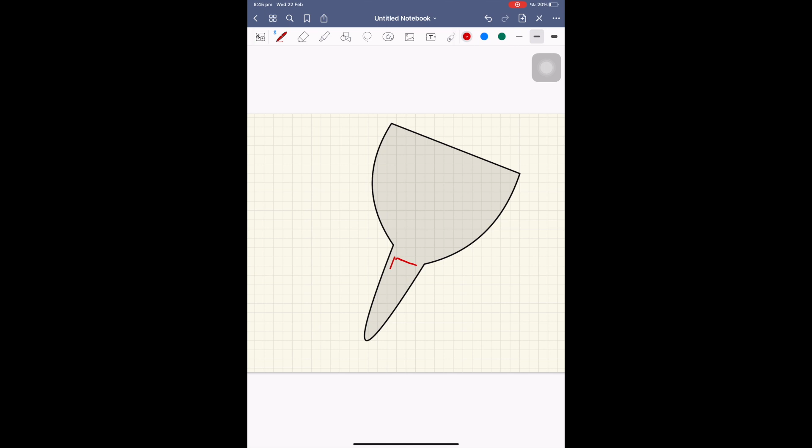I've given the question of how to mount the fuel tank into the keel quite a lot of thought. My main concern was whether or not the keel would flex as Wanda heeled over, because if it did, what would happen to the fuel tank? It would seem to be a mistake to have a rigid type of mounting solution. Therefore, I arrived at the conclusion that I should come up with a solution that would allow some movement should the keel flex whilst the boat was heeling over. So this is the design solution I've come up with.

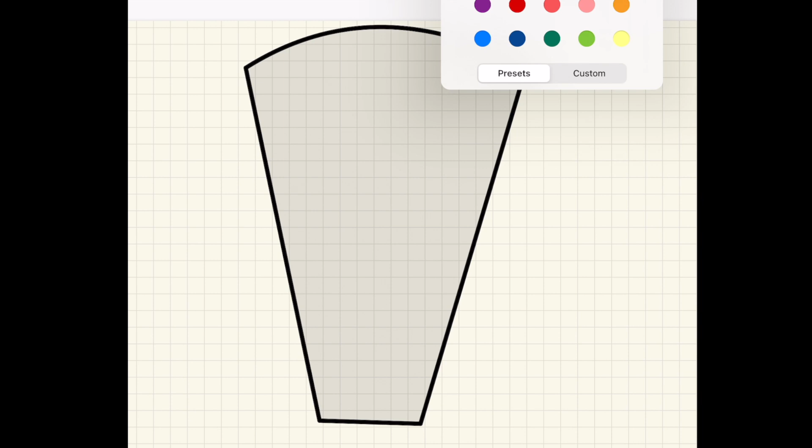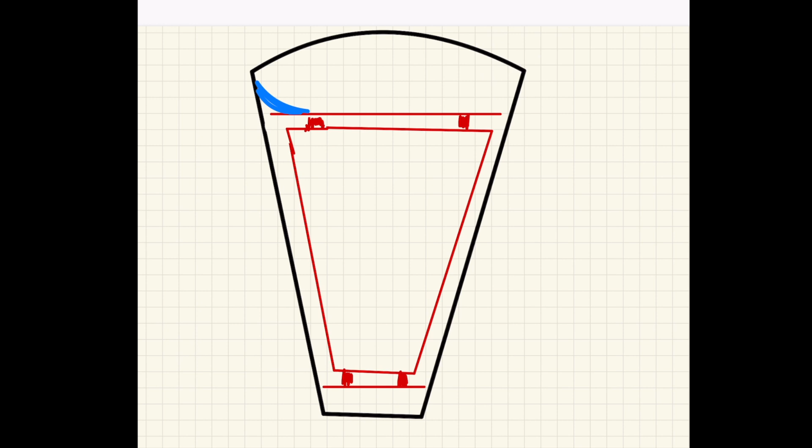The black line here represents the cavity space of the keel, and the red outline represents the fuel tank. First, I will create a plate that is perpendicular to the front face of the fuel tank, and make a similar one for the rear side of the fuel tank. I will mount this to spacers so that there is some clearance between the plate and the fuel tank. Next, I will laminate to the side of the keel walls some tabbing that will create a face that is flush to the front of the tank. I will do the same for the rear of the tank.

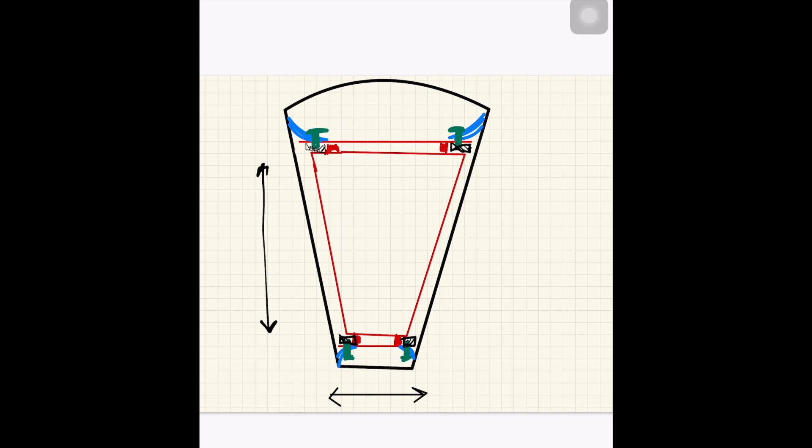Finally, a rubber bush will connect the mount tab to the keel onto the plate at the front and rear of the fuel tank. These tabbed mounts will control the movement of the tank forwards and aft, with a nitrile gasket in between to allow some movement. The rubber bushes will control the movement of the fuel tank side to side and also up and down, and hold the fuel tank in place should a knockdown scenario occur. Okay, so that's the solution or the design done.

Now, in terms of sourcing the components, I've also done that as well. And this piece here is really what the whole solution is based around, and it's a really nice rubber bush, and I can put an M8 bolt through it. It's got a flange of about 24 millimeters. It's 18 millimeters across and 19 millimeters long, and this has got what they call a Shore hardness A value of 40, and this is how they measure the rigidity, I guess, of rubbers.

Now, Shore A hardness 40 is about the stiffness of an eraser on the end of a pencil, which isn't ideal. I'd probably prefer something like the stiffness of maybe a car tyre, because I don't want the tank to be flopping around too much inside that cavity. I do want to allow some movement, and yeah, I had some concerns that this might be too soft, but if I have these spaced properly on both sides, front and back, I'll end up with about 38 of these.

So if we think about the fuel tank, 200 litres, if that was fully loaded with diesel, 180 kilograms. So let's say that most of the time it's 2/3 full, so 120 kilograms divided by 40 of these, so it's about 3 kilograms per one of these. Now of course that's not exact, because depending on the angle of the tank and the vectors and everything, the load isn't going to be distributed 100% equally, but for a few kilograms for each one of these, I think it's going to be fine.

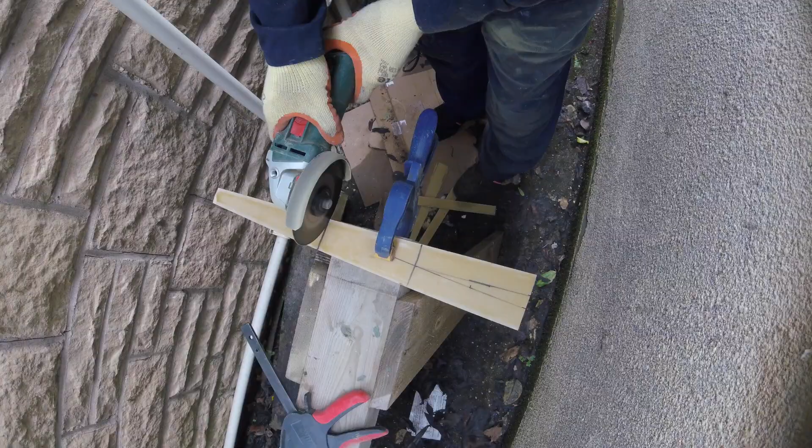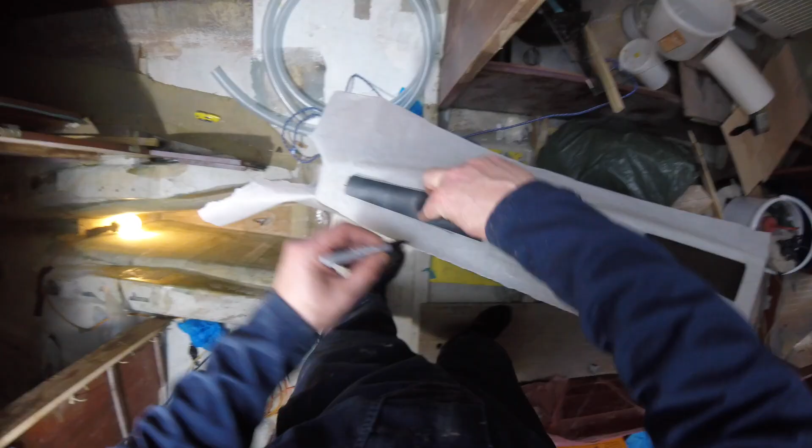Right, so I just want to bed these feet down. I'm just going to put them down with some car putty filler, because it's really fast drying. But before I do that, I just want to position it, because there's a bit of a seam there where there's a layer of fiberglass overlapping the other. So I want to make sure that these are before and after the seam, so that the seam's not making this wobble. So I might just stick these down and do a little dry fit.

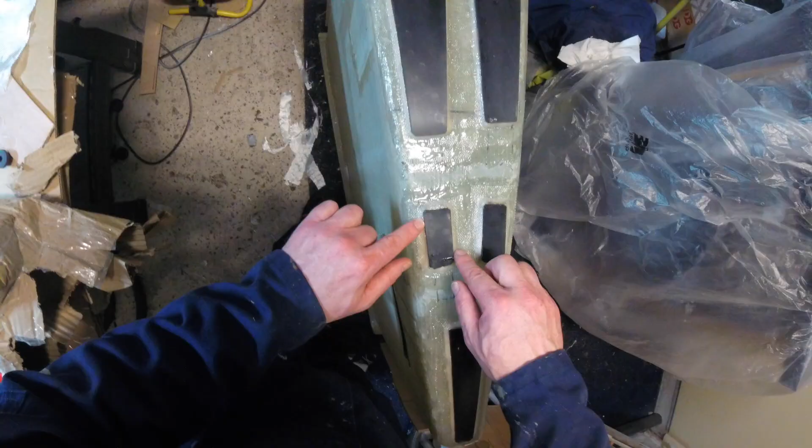Well, I'm back in Wanda. It's around 8 or 9 degrees, so I've just come down to hopefully get that last little piece of laminating in the keel done. Although looking at the thermometer here, it's still showing 5 degrees. But it should just be warm enough to get some curing done.

So I've just suited up to do a bit of sanding down there. I'm using my 9mm Makita belt sander, which is the best tool I've found for getting into the bilge and being able to get to tight corners. So just a little bit of sanding, and then I'll hopefully finish the last of the laminate.

Okay, well, all that nasty sanding is done, and I've just prepared it ready to put the last bit of laminate down. And now I think I'm going to show you a first, and that is an awesome tool that Mads from Sail Life doesn't have. And that's a pretty rare thing because that guy's got every cool tool I've ever seen in my life, but I've got one that he hasn't got, as far as I know. Let's have a look at that.

Right, well here it is. It's a pair of electric scissors which I can use to cut fiberglass cloth, and I think I saw Andy from Boatworks using this a long time ago, and I thought, oh, looks like something that's a bit of a gimmick, you don't really need it. I used to cut everything by hand, and I just wanted something that was sort of portable and easy to cut cloth on the job, rather than cutting out templates and then doing it on a bench.

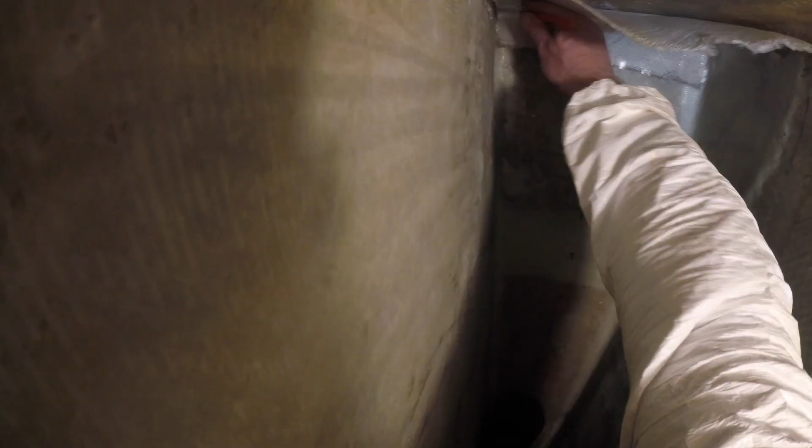And because the blades are so small, you can really go around corners and things really easily. And I tried it out at home and just did a couple of quick cuts, and I'm incredibly impressed by it. And there's two blades, one for light material, which I can use here. This is 450 GSM triaxial, and so I can kind of just cut a piece out, look how straight that is, and then trim it in situ. Need to get this bit of space, don't I?

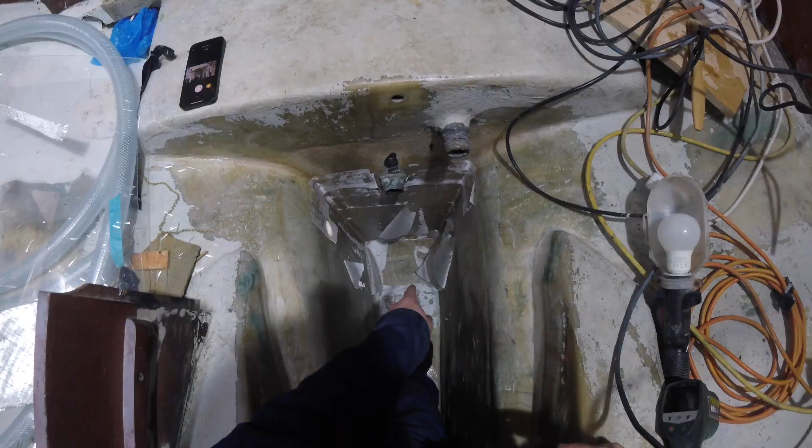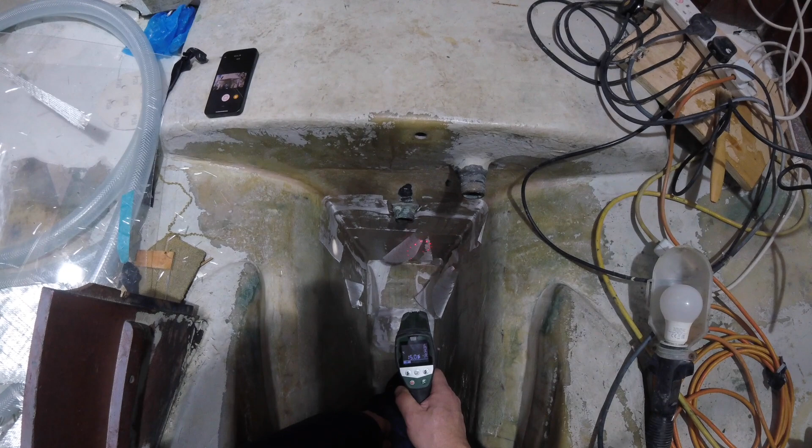Right, so I've got that last bit of laminating in, and my entire bilge now is completely encapsulated with epoxy resin laminate. So really pleased about that. If water gets in here again, I don't have to worry about it. And I just had that little heat lamp in here pointed at this, and it's 15-16 degrees, 20 degrees down there, which means it's had about 48 hours of hopefully 15-20 degrees. So yeah, that should have cured nicely.

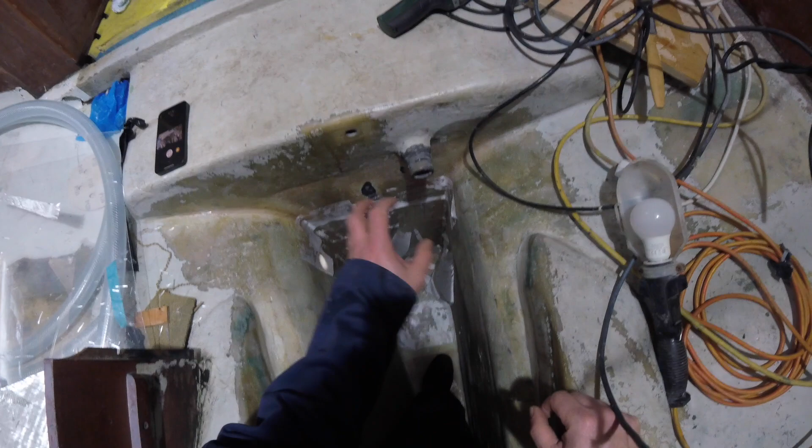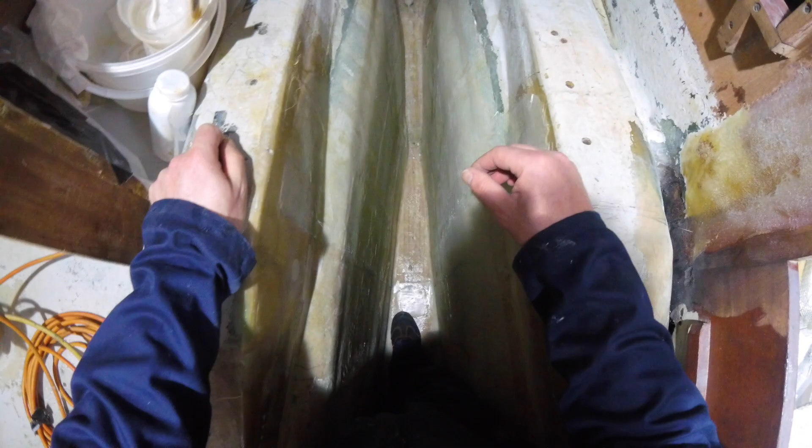I've got a little bit more tabbing to do up around here, but I just wanted to get all this bottom part done so that I can continue on with mounting the fuel tank in here. All this stuff I can do later, it doesn't matter if the fuel tank's already in here or not. So, job for today is do a bit of tidying up, but also to take the fuel tank and sit it down here and do a dry fit.

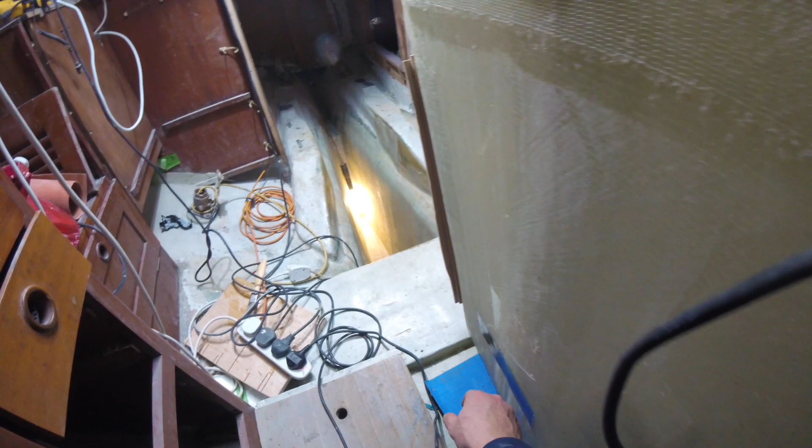I've just done another dry fitting of the tank in the bilge, and I've started to put together some templates now. So just some plywood here. This is touching against the side of the bilge, so this is where the wall is. Same with that side, and it becomes really apparent on the aft side when you can see the unevenness here, and that's really a reflection of what the keel is like, which is fine because there's lots of layup that I've done, and the original mould as well was quite uneven. Now I've got a really good match against where the sides of the bilge is, so I can start to put my mounting construction together.

Right, so I'm ready to thicken up this plate, which will go on the front of the tank to mount it into the keel. And this is 3mm G10. This is some of that material I used to make up the battens. It's 5mm, so this plus this will give me 8mm of thickness, which will be good because I don't want this plate to be too thin. As an example, if this was the thickness and this was the mounting against the keel and this was the tank and it was moving around a little bit like this, it could actually just shear that bush. So the idea being that if it's sort of 8 or 9mm on each side, it will allow movement without any chance of damaging the rubber bush.

So this is made this relatively runny. I don't want to put too much in and just have it squeezing out everywhere, so I probably just put too much in. Okay. Right. A little bit of mess back here. Nothing that can't be fixed.

So I can drill through those holes there, and then I need to clean this up here a bit, and down there.

Right, so I've got a fillet along there and along there, and I've just used some car body filler, which is a polyester based filler, and it's kind of good because it dries really quickly. It dries in about 20-30 minutes. I just want to tack this in place, and now I can take out these screws holding it together, remove the fuel tank which I'm sitting on, and then come back and laminate it in properly.

So yeah, there's the first section down the bottom and the second section up the top. Right, so I'm ready to tab in the other side of the mount for the fuel tank. Obviously the aft one there is done, so this is the back section, and I've put a little bit of tabbing over this. Obviously it was held down with thickened epoxy, but then I've also put one sheet of laminate over just to help keep it nice and secure.

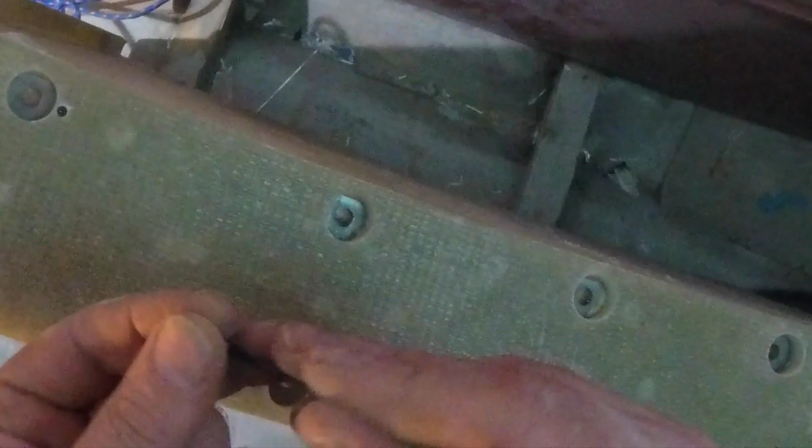Here are the backing plates that have been tapped, and I've just got some little M4 grub screws here which I'm putting in to just hold the backing plate in place, because obviously once I put it down into the bilge there's nothing to keep this in place, so hopefully these will line up. Right, let's put it in. Well, I'm quietly confident that this is going to be the last time I come down to Wanda to fit the fuel tank in. I've got a little bit more work to do. Let's take a look at that.

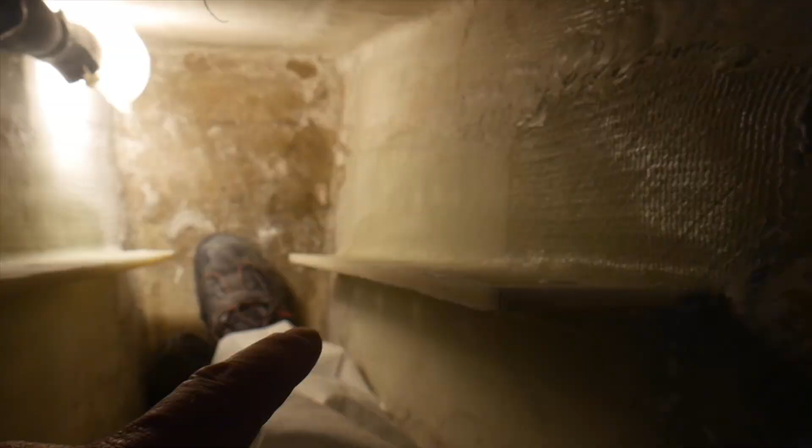Right, so one last thing I need to do now is just re-drill out all these holes which have been laminated over. So that's where that timber template comes into play. One of the things I wasn't sure of was whether or not I needed to put some sort of triangular supports here and laminate them in. But this is so resilient and stiff, like I really can't move this at all, so I don't think I need to do anything more here.

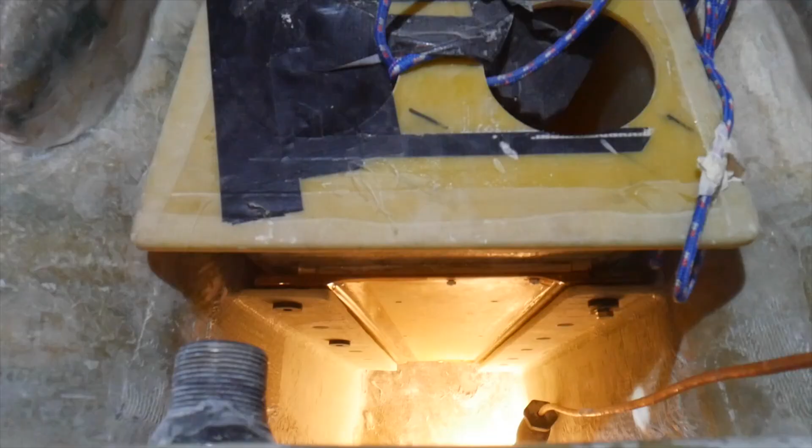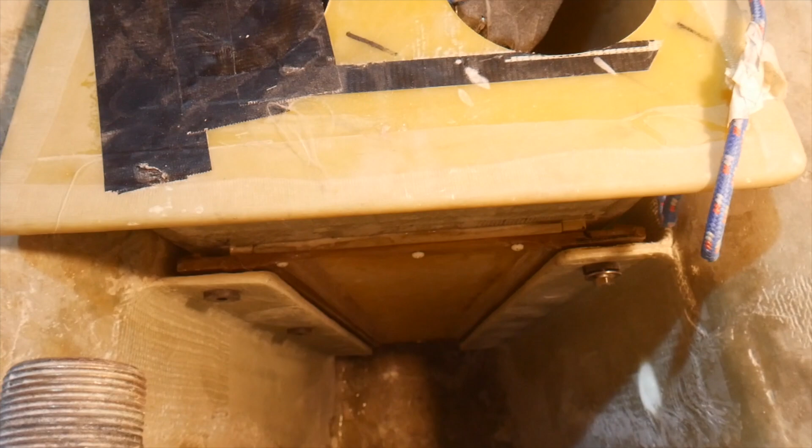Great, so this is it. It's a little bit difficult to see, I can't really get the camera down here properly, but essentially you can see that I've got this front tabbing done in place. It's really sturdy and stiff, and all of my holes have lined up so I can put the rubber bushes through them all and then secure them with the bolts. So yeah, really pleased with this. Job done for now.

Well, thanks very much for watching and for persevering to see the end of the fuel tank project. This fuel tank has kind of almost been the end of me, really. It's been something that I've not enjoyed, and the reason for that, I think, is just winter, how I couldn't really laminate the keel how I needed to. Jumping in and out of the keel the whole time was really physically demanding, being in a cramped spot, having to do it piece by piece, not being able to get a video in there and shoot video for you. If I was wearing my head camera, all you'd see is the side of the walls and the keel. If I was using this camera, all you'd see is me in the way, so I just couldn't get any footage, and that was making it very frustrating for me as well.

So yeah, a whole heap of factors have just sort of made this a little bit of a mental block for me to get over, a bit of a hurdle. And now that I'm over it, I'm really hoping that the rest of the project is going to go a lot faster, and I'll be able to accomplish a lot more in a lot shorter amount of time.

The other thing that's happened during the process of this is I've just been through a really nasty child custody application to the courts, and it's just been incredibly stressful and physically taxing. So mental health and physical health have suffered a lot through that, I think. Anyway, I'm out the other side of that, and the good part is I have every second weekend with my daughter, which is fantastic, having a full weekend. And it means the other weekend I get to myself, so potentially I get 2 days in a row to work on Wanda rather than just one day every weekend. Yeah, so that's been really good.